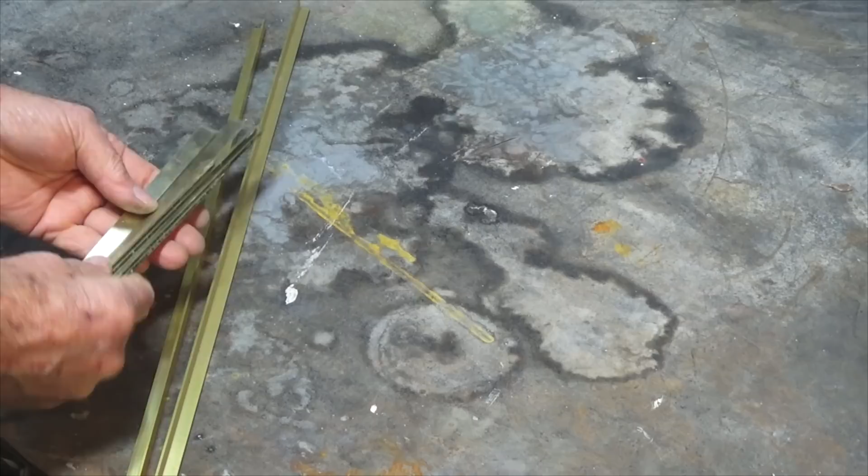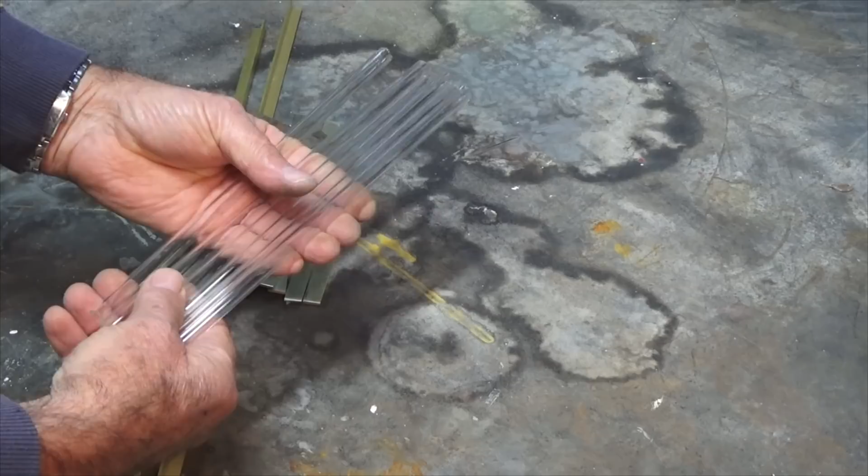So here's some materials we're going to be using in the project. We've got some brass angle stock, some brass strip stock, being cut to various different lengths. We've got some sheet metal brass parts that have been roughly cut to size, some 3D printed parts, and some 10mm borosilicate glass tubing.

And the answer is an Art Deco inspired wall sconce, or actually two of them.

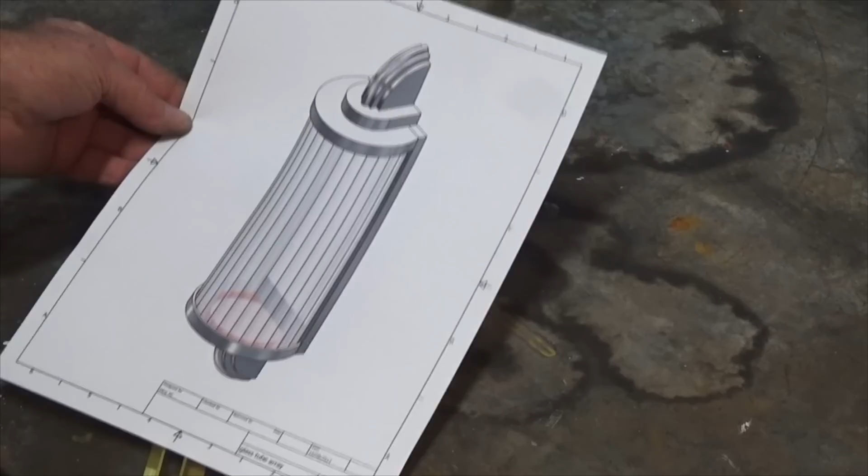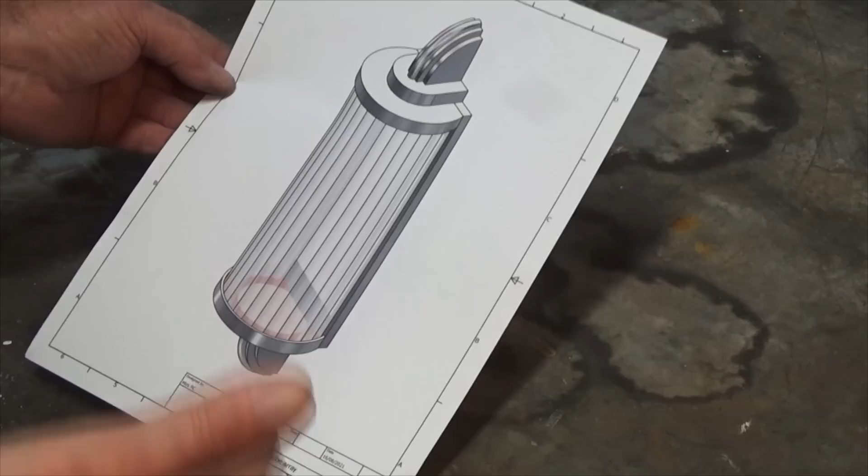Now you're also probably wondering, what is a wall sconce? Well, here's a picture of one. So a wall sconce is a light fitting that you screw to the wall. This is a very old style of light fitting, used back in the times when we had candles and oil lamps as our only source of lighting. The reason they were attached to the wall is that it was easy to get at. They could be placed about head height, and you could usually get at the inside of that wall sconce and light a candle or clean it, or fill it with oil. Another reason they were attached to the wall is that they could be projected away from the wall so that heat and flame would have a harder time setting fire to wallpaper or curtains and so on. Now when these light fittings were electrified and fitted with light bulbs, they served the same purpose.

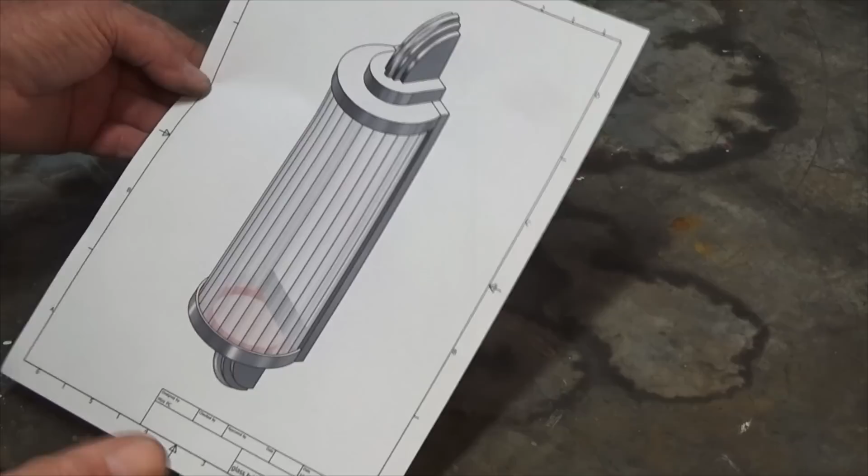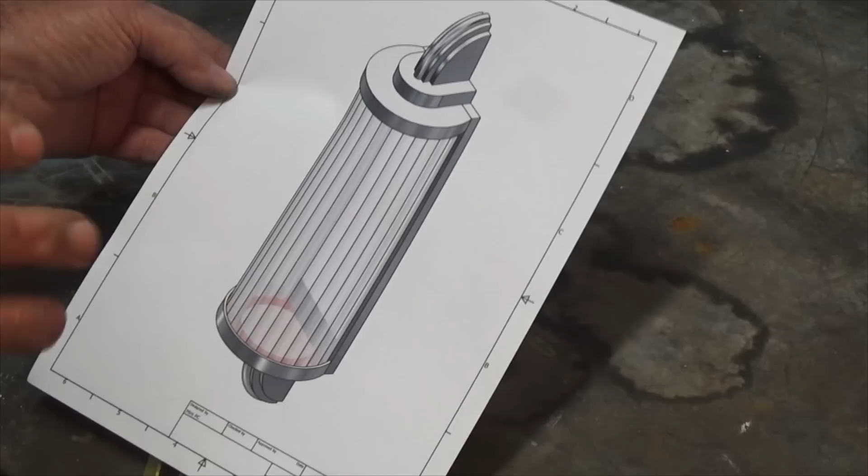A wall sconce is also very handy when you have very low ceilings or very high ceilings. If you've got low ceilings, you can place it against the wall, and there's less likelihood that somebody's going to bump their head on it than if it were fitted to the ceiling. When you have very high ceilings, you can place the light at a level where it's going to do more good. So these things are often used in hallways, hotels, cinemas, where you'd have these very high ceilings, placed along the wall to illuminate pathways and walkways down the side of the cinema seating.

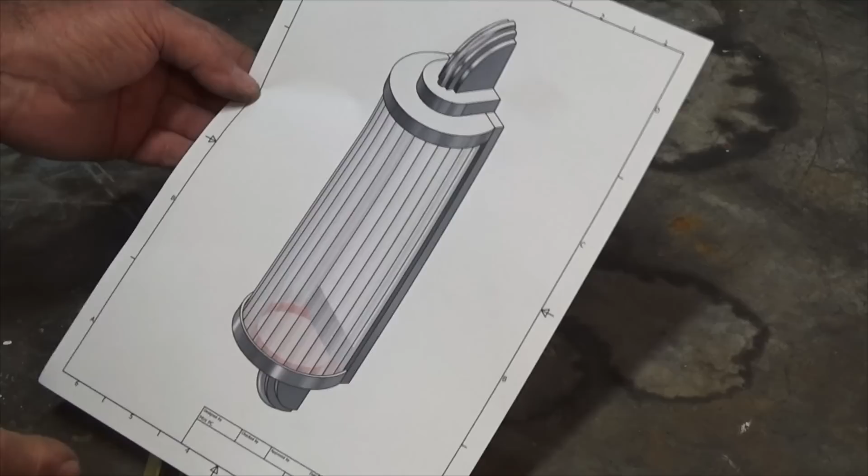Now, this is Art Deco inspired, and this is going in a room in our house, because our house was built, well, it's actually a replica of a house that was built in the 1920s, and that was leading into the period when Art Deco was at its height.

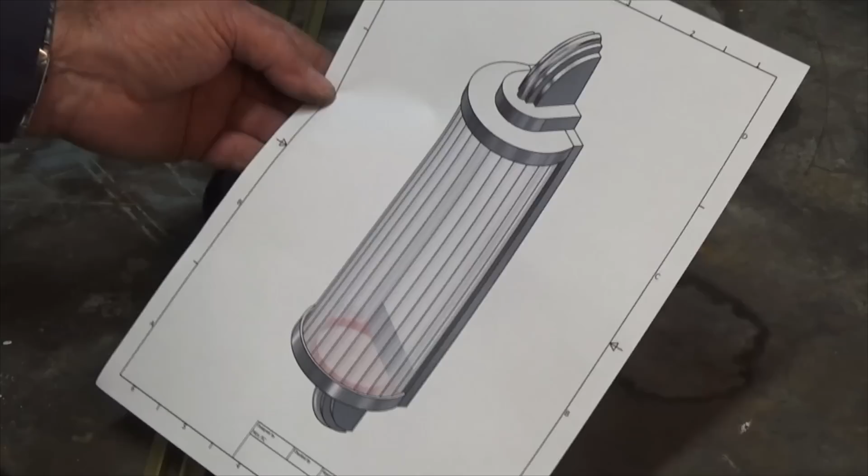So the wall fittings that we have in this room at the moment are sort of Victorian style. They're not old lights, they're new replicas, and the trouble is they're very badly made. These days they make them out of steel and chrome plate them or plate them in some way, but they don't do a very good job, so corrosion starts to come through from the underside of the plating. So we want to replace them, but we want to use something which is going to last a long time.

That's why we're going to be using brass, because it doesn't corrode as readily as steel. I'm going to electroplate the brass when I'm done, and we're going to use glass because unlike plastic, it's very heat resistant. It's not going to crack or break down over time.

So that's the project. So we're going to get started. I'm going to make up a rectangular frame for the back of this light fitting. You can see here, there's a frame running around the entire back side of this, and that's what gets screwed to the wall. Then we're going to have some parts which are fabricated from brass sheet and brass strip. These are going to be castings made of brass, and these will be electroplated along with everything else. So, fun build, and yeah, let's get started.

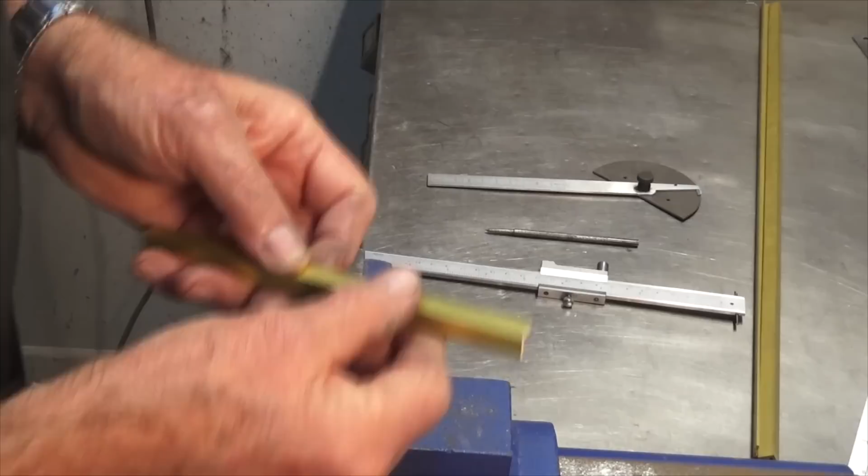This is a drawing of the rectangular frame we need to make. It's made of 3/8 wide brass angle, and it's 1/16 of an inch thick on each leg of the angle. All we're going to do here is mitre one end of this stock, and I'll do that on the sanding belt.

Then we'll measure out the correct length, cut it square, and then mitre the other end back to the line. So I'll go and get one end prepped now. Just got this little fence set up here.

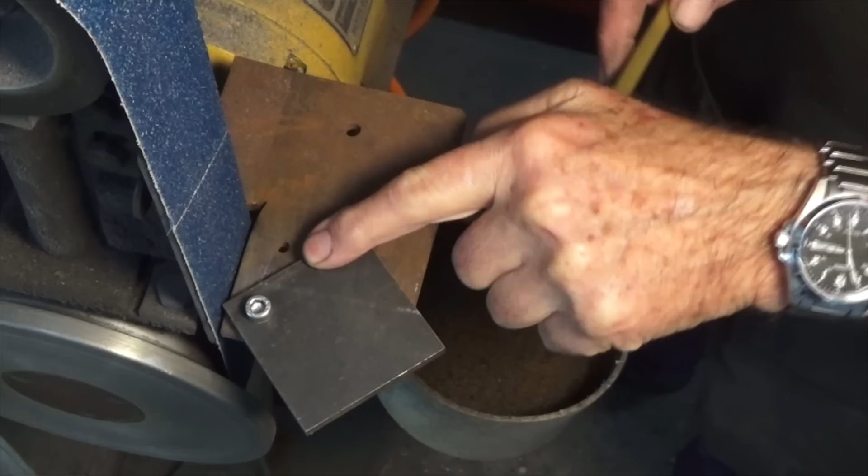It's screwed down 45 degrees to the face of the belt, so I can work the stock in against the belt like that. And when I go to the opposite end, we're going to have to stand it upright like that, but once you get enough feel against that fence there, you know you've got it square.

So I'm going to do one end of each piece of stock. I've got several pieces, so I'll get all of those done now.

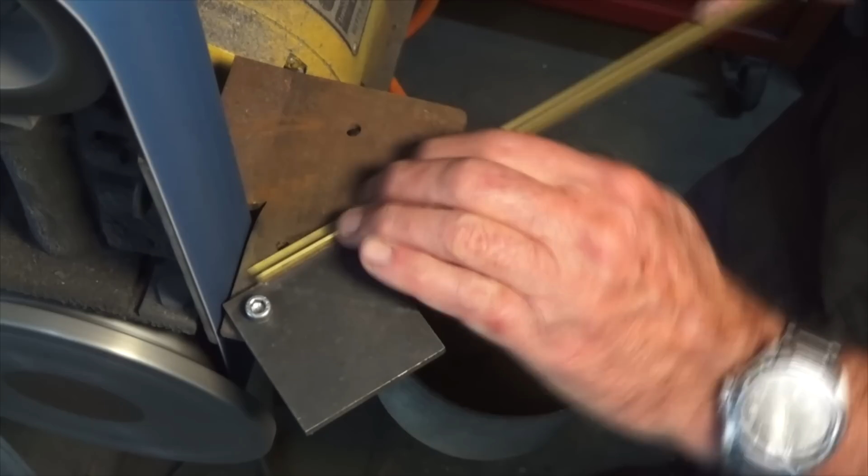Now these short ones, I've got one of these little vernier marking gauges, so I've set this to 83.9 and we're just going to scribe that off there.

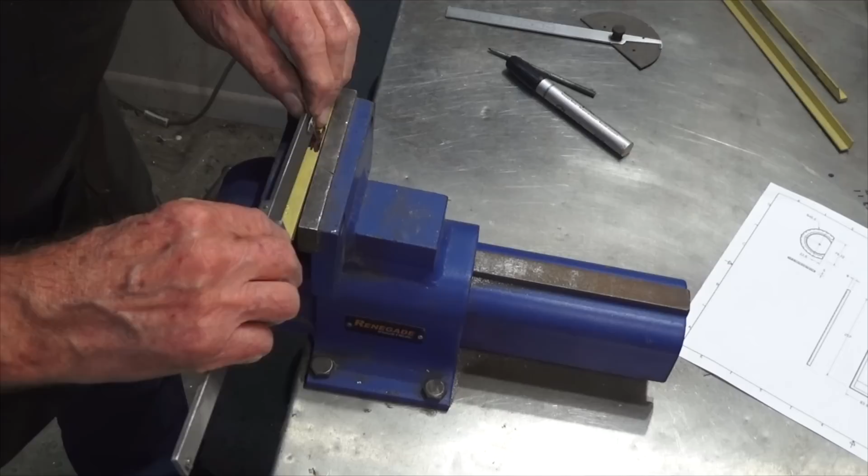And on the longer ones, we're going to have to just use a steel rule. So these are 257, roughly there.

So I'm just going to cut this square and then we'll mitre it back to that line.

Okay, I'll leave us 2 pieces for our frame. I've got to do 2 frames altogether, so there's going to be 8 pieces, 8 corners, but I'll just do 1 to give you an idea, and then I'll go ahead and make the rest off camera.

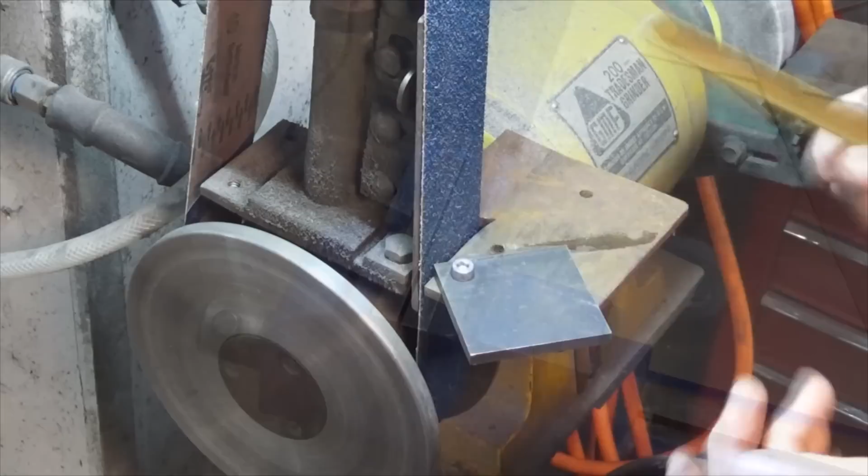So this time for the other end, I've got to put the piece in like that with the flat leg on top. I can see the scribe mark from where I'm standing here, and we're just going to keep cutting in until we just kiss that mark on this edge here.

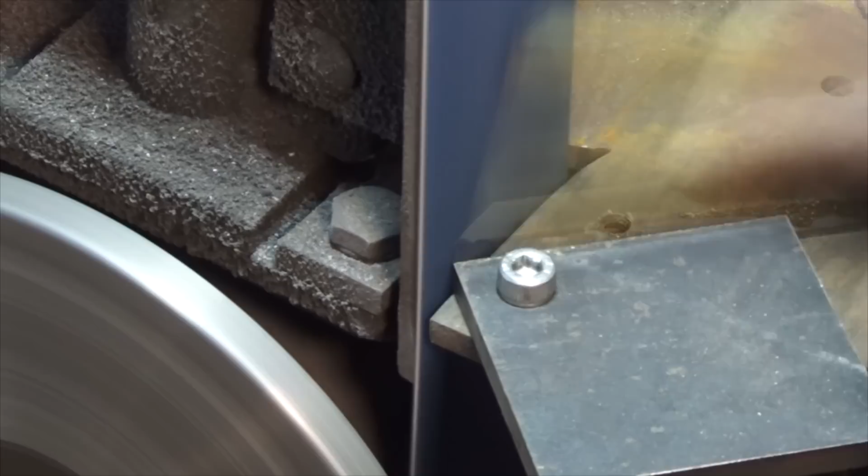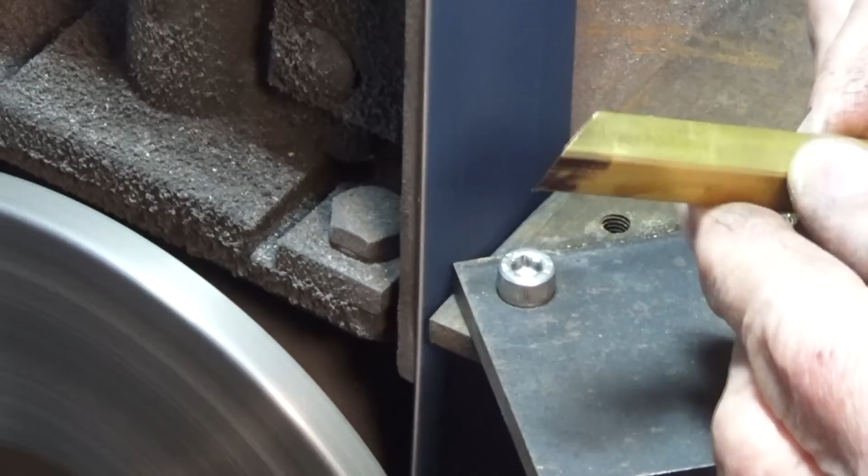Okay, this is a fixture that I made up for doing the corner joints, so we're going to silver solder those mitres, and it's really important that you keep this brass stock flat and aligned while you're heating it and putting the solder in the joint.

So what I can do is lock these parts down just with those socket head cap screws, and you can manoeuvre these parts into position just by having those screws slightly loose.

So there it is there, and this cutout on the corner here is just so that we can get the heat into the brass and not take the heat out through this steel fixture. If that cutout wasn't there, we'd have to preheat the steel, which is a lot thicker, and by the time we got everything hot, this brass would most likely have oxidised and you wouldn't get as clean a joint.

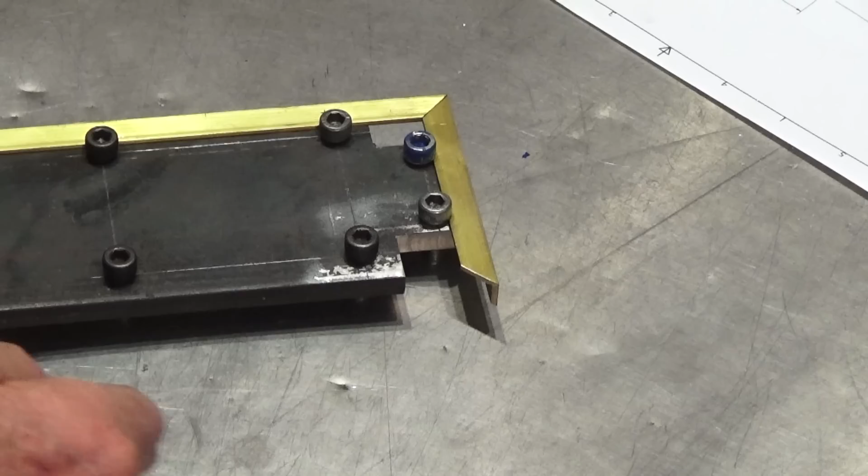And what I can do later on is I can put the other part on this side of the jig here, or the fixture, and just move it over slightly and get at that corner as well. So we'll do the corners one at a time. So let's go and do that now.

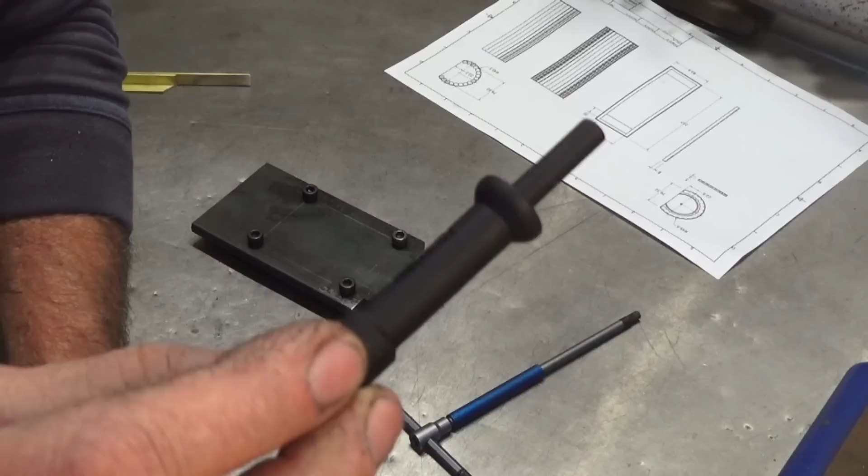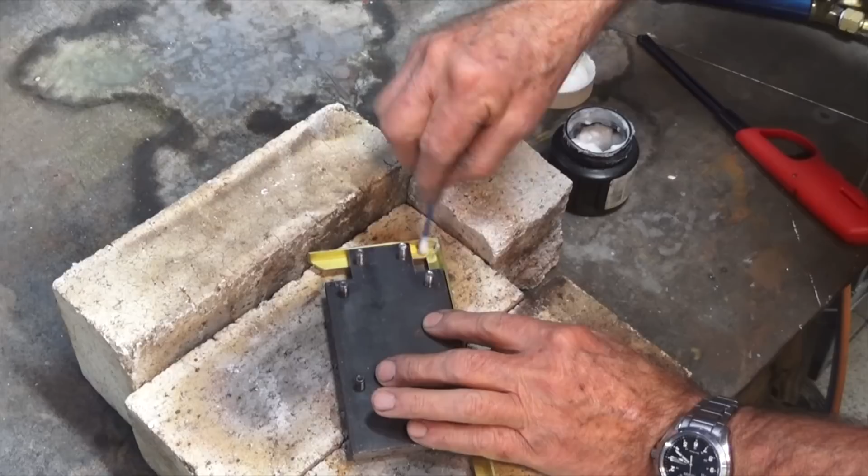So we're just going to coat this with some silver solder flux on the inside. It's probably better to use too much than not enough when you're doing this.

And I'm just going to cut off a small piece of silver solder and put that in the joint or along the joint.

Alrighty. So I'm using oxypropane to do this.

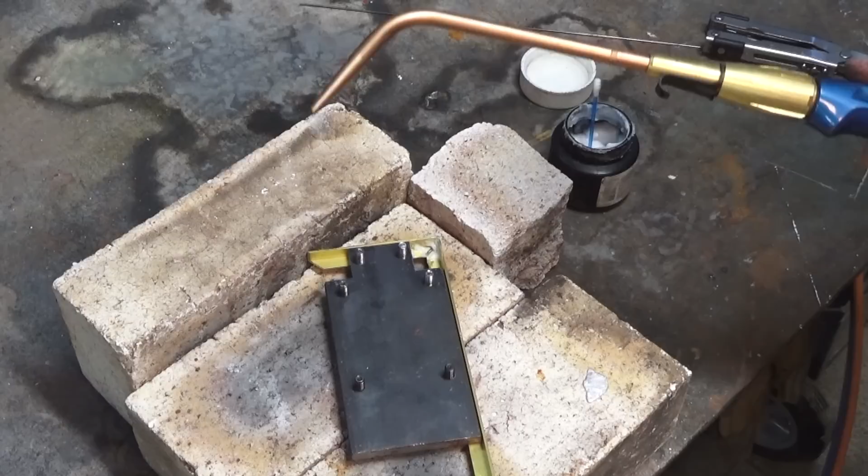So just gentle heat to start with. If you boil that flux off too rapidly, it'll shift the silver solder around. What you should see happening is the silver solder, or at least the flux, should dry out. And then it sort of goes glassy.

I think that's run all the way along there. I'll just give it a bit more. Alright, that's one done.

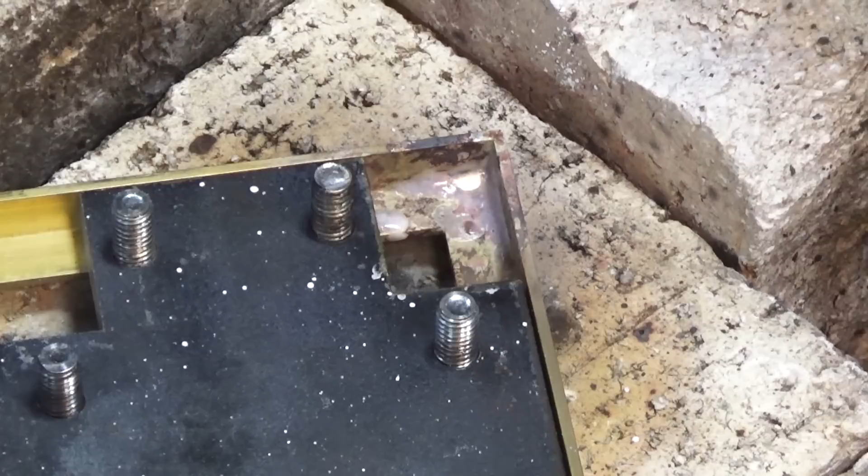Now it looks pretty horrible, and we will need to pickle that to get rid of that silver solder flux. It's basically a borax material, and it will dissolve in sulfuric acid. That'll clean the joint as well. But I'll get all 4 joints done, and then we'll clean it all up at the end.

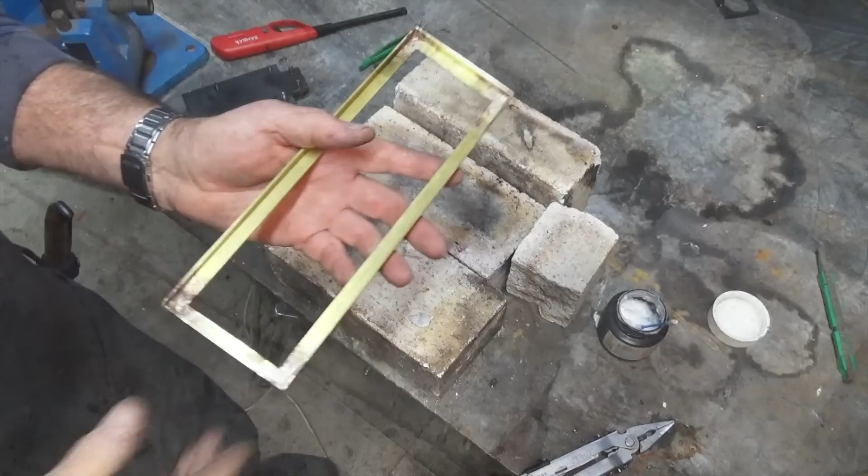Now there's the first frame done, and I just cleaned up this corner here on a Scotch-Brite wheel. It's sort of come out pretty good. It will need to be pickled in sulfuric acid though, to get rid of all of this glassy flux on the inside of the joints there.

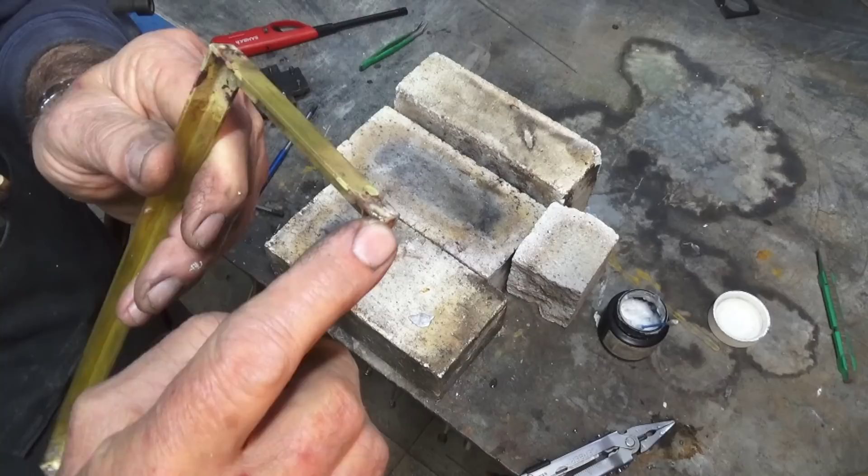And I don't know if you noticed, but I completely botched this corner here. I overheated it and it's melted away. So I'm going to have to clean that and then build that up with probably soft solder. One of the good things about electroplating this material is that you can electroplate over soft solder, silver solder, brass, and it's all going to come out the same when you're done. But yeah, I just overdid it with the heat.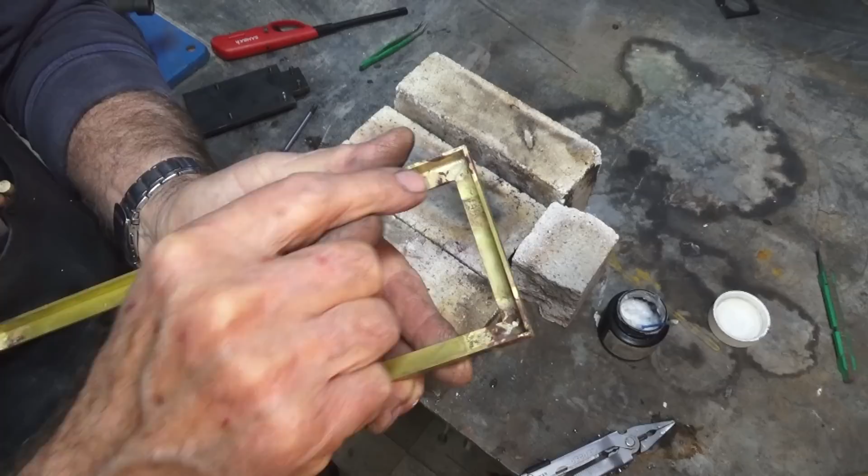What I'm finding with this silver solder that I bought is that it doesn't flow as readily as the stuff I used to use. Back in the bad old days, you used to be able to buy SBA 45, which was silver brazing alloy, 45% silver, but they also put cadmium in the alloy. What the cadmium did was it made it flow so much better. It just wets the joint, flows right through the joint very easily.

Only problem is cadmium is toxic, and if you boil the silver solder, the cadmium comes off as a vapor, and it can give you the same symptoms as a heart attack. I've noticed that in the Model Engineer magazine, they reported a lot of model engineers in England dying of what looked like heart attack symptoms. But what was happening is they were doing this in winter in a small enclosed workshop, and they were breathing the fumes, and yeah, it was killing people. So workplace health and safety removed the cadmium, but it just doesn't flow as readily as it used to.

Anyway, I've got another frame to do, and I can guarantee when I get to the 8th corner, I'll have it nailed. Alright, this is the 8th joint, so let's see if I have nailed it.

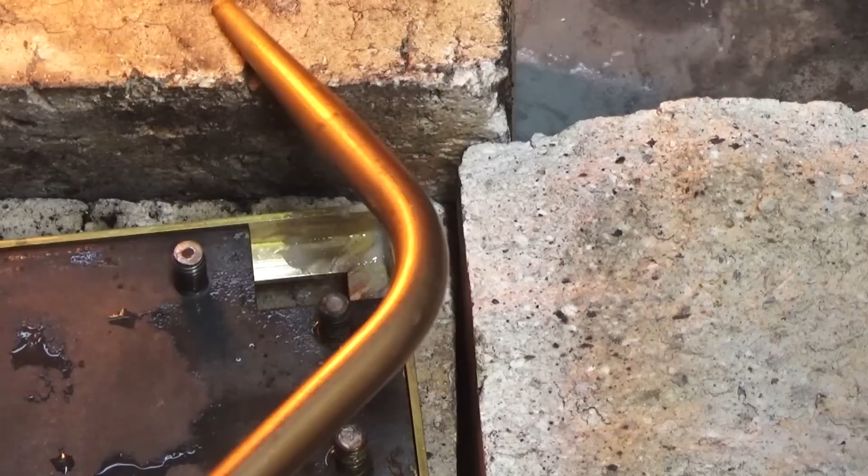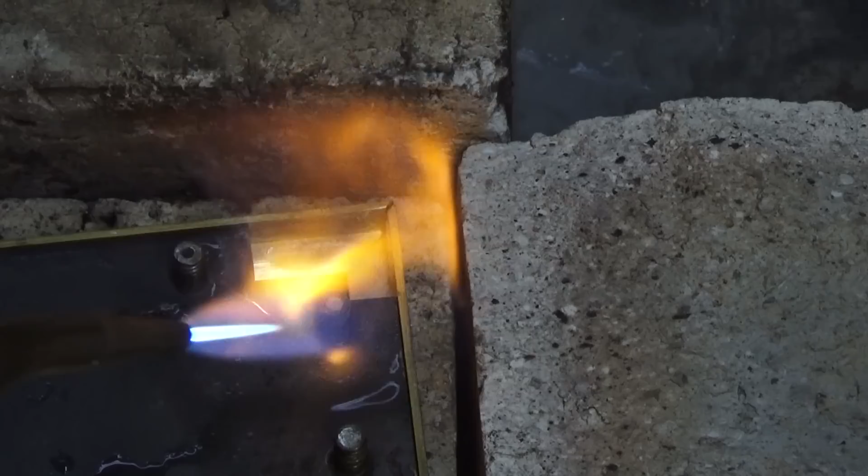So what I found is that heating it from the top works better. It's a lot easier to judge the temperature. If I push it into the corner of the bricks there, I can get some reflected heat back from the fire bricks. Then I put the silver solder in when the brass has gone red hot, and it just sort of flows straight away. So a bit counterintuitive, it's not how I thought it should be done.

It just shows you, if you stick at something long enough, you'll work out the correct method.

You may not have noticed there, but it just sort of ran up that vertical joint, filled the mitre, and I don't have as big a build-up of silver solder in that corner there. So everything I showed you in that first example, just ignore that. That's the right way to do it.

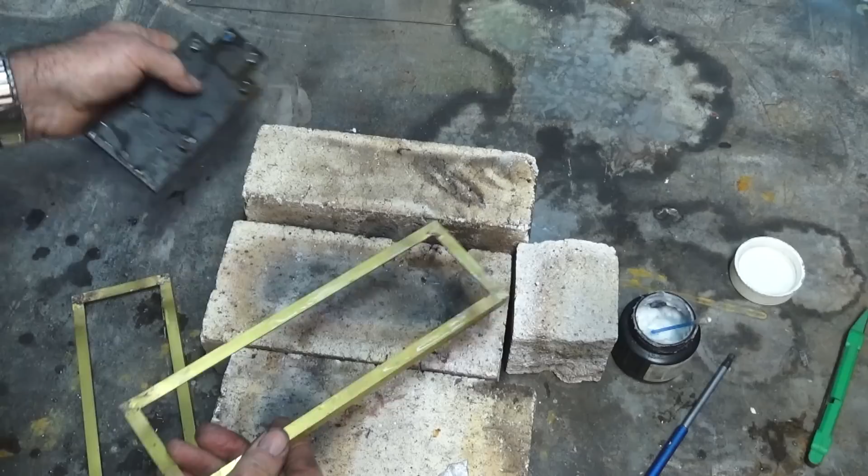Alright, so there's the second frame. Here's the first one.

And they're nice and square, same size. So what I'll need to do now is just clean up all these corners, get them all sort of semi-polished.

Right at the end of this build, we're going to have to do all of the polishing on the brass and get it really, really good before it goes into the electroplating bath.

Now that these silver solder joints are done, we need to remove all of the excess flux. It's still on the surface of that brass there, and it sort of goes like a glassy consistency. Quite difficult to remove any other way, but an acid pickle will eat through that flux very quickly.

It will also remove all of the oxide from the brass. So I'm going to do one of these in sulfuric acid, and then I'll show you a safe alternative to sulfuric acid if you can't get it. So let's get this one in the acid first.

Okay, what I've got in here is about 15 litres of dilute sulfuric acid, and that green or blue colouring you can see there is just contamination from copper. I've used this quite a few times for pickling copper, and some of that copper goes into the solution and it leaves it that colour. But we're going to put our brass part in there, and we're going to leave that for about 20 minutes, half an hour, and then we'll take it out and have a look.

I'm going to show you another material we can use if you can't get sulfuric acid. This is the best alternative I've found for doing this sort of work, and if you're in a home workshop and you don't want to have acids lying around, especially if you've got pets or young children, this is a much safer solution. So we're just going to use ordinary vinegar and table salt.

So the recipe is 1 cup of vinegar, and then 1 tablespoon of salt. Normally what you do is you heat that up to help the salt dissolve more quickly, but if you leave it overnight, the salt will dissolve into that vinegar quite readily.

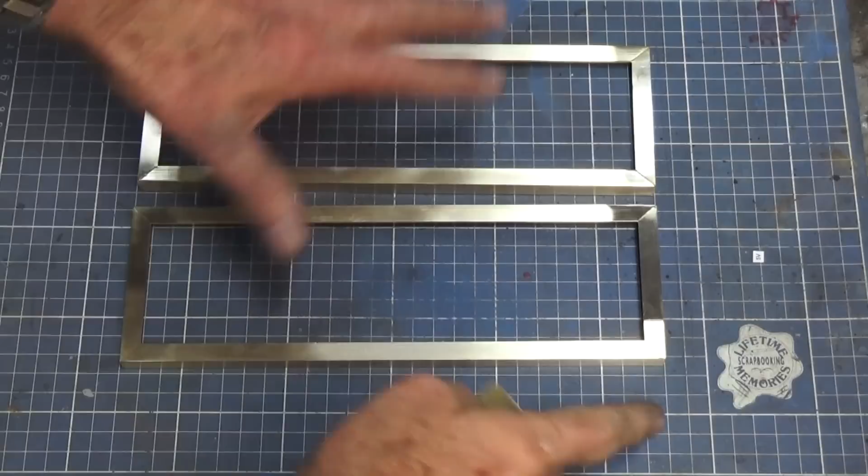There's our two frames, sort of partly cleaned up, and what I want to do now is make two pieces of this 20mm wide brass sheet, and they need to fit in between these edges on the frame. These are going to be a mounting point for all of the decorative parts that hang off the top and bottom of the light fitting, but also for these light sockets.

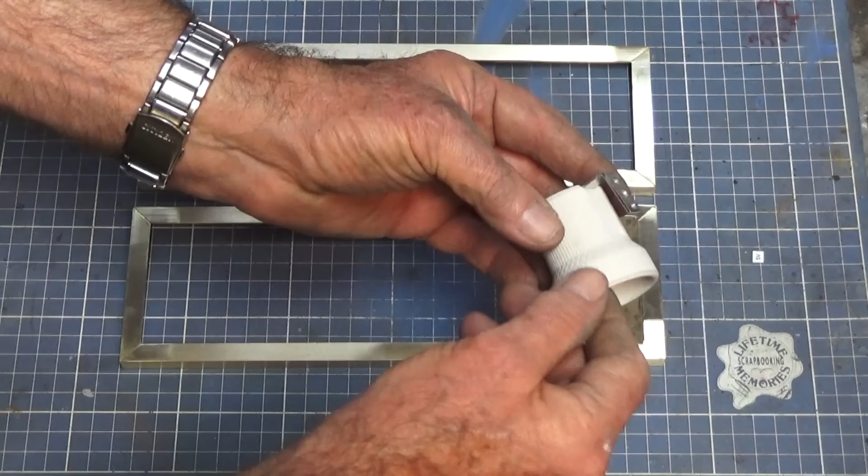So this is a ceramic socket with an Edison screw fitting, and it's got a steel right-angle fitting there with a couple of threaded holes, and there's our wiring points there.

That's going to allow me to screw those top and bottom from what will be the outside of the light fitting. Now the only problem is I don't want to solder this edge to edge - I want it to have more contact area. So I'm going to machine a slot down both ends of this stock here.

This is 2mm thick. The brass angle is 1.6 thick, so I'm going to have to go almost to the back surface, but it can be done. Then I'm going to push that into place and soft solder around three edges, and that will give me plenty of contact area. Soft solder will be plenty strong enough for this.

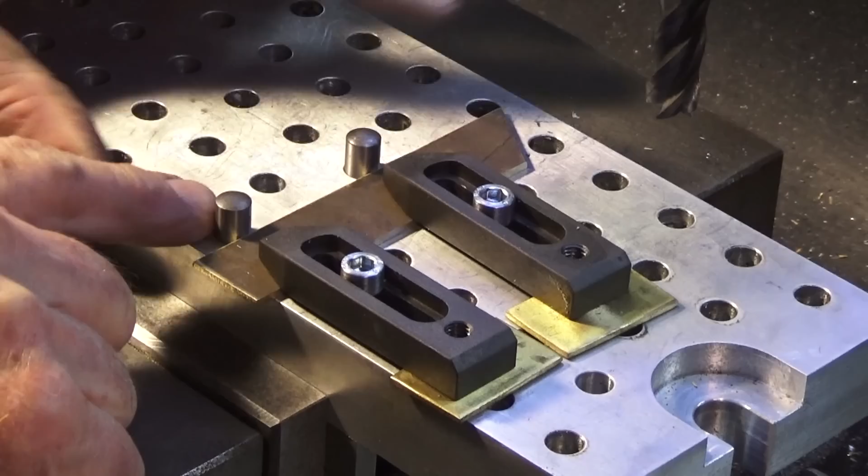Now this is how I'm going to hold this stock here. I've got this mini pallet in the vise on the mill, and a couple of clamps holding that up against some 8mm dowels, so I can align this square to the pallet. I'm just going to machine one end square, then do that little rebate - it's going to be 2mm wide and 1.6 deep - then flip it end for end and do the same at the other end.

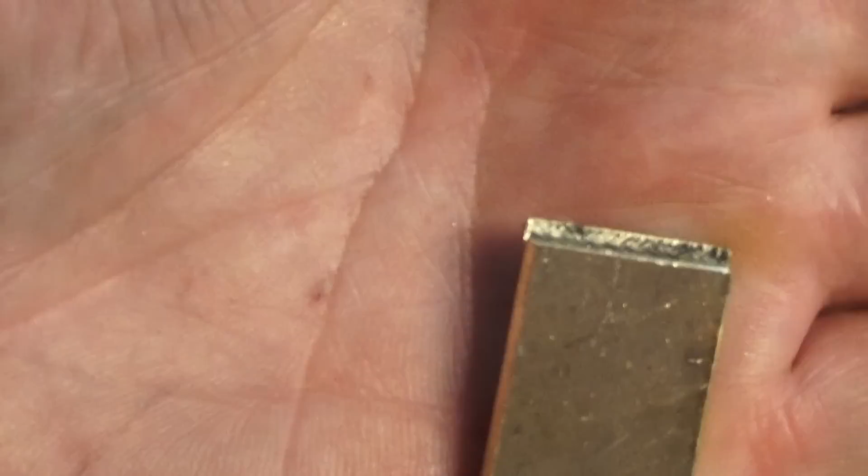Well, there it is, and you can see there's not a lot of meat left on that, but it worked okay. We're just going to machine this to length now and do the same at the other end.

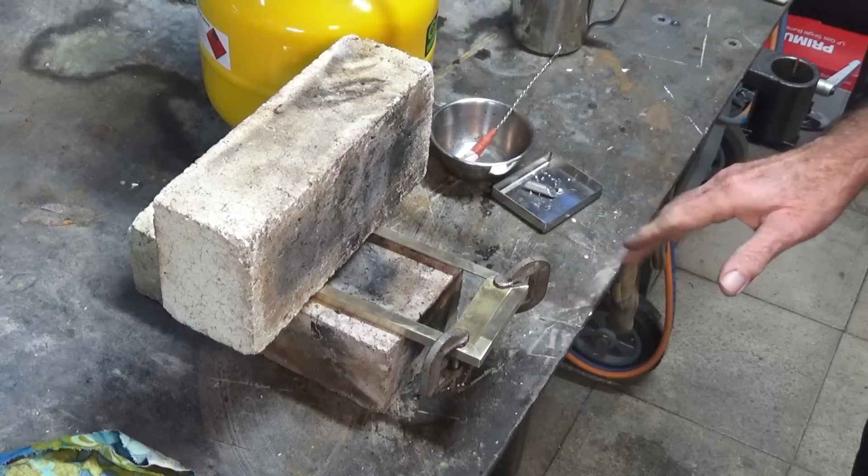Okay, I'm ready to join these little plates onto this brass angle frame that I've made, and there's probably ten different ways you can do this, but I've decided to do this really old school. So I'm going to use a copper soldering bit on a gas flame, using 60-40 lead tin solder.

I've got some zinc chloride flux in a small container here with a silicone brush, and I've got another stainless steel container with some dilute zinc chloride flux. This is going to be used to clean the copper soldering bit before we put it on the metal.

So I'm just going to do this one, then I'm going to talk over it as I go and explain some of the points about using this old school method for soft soldering.

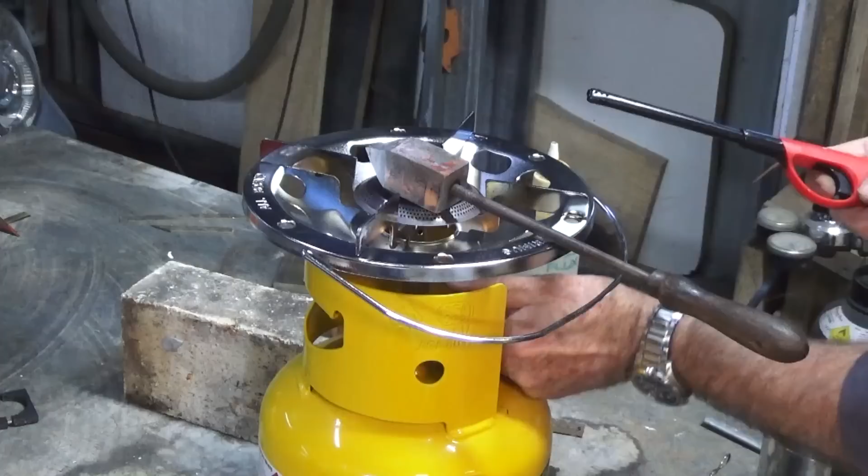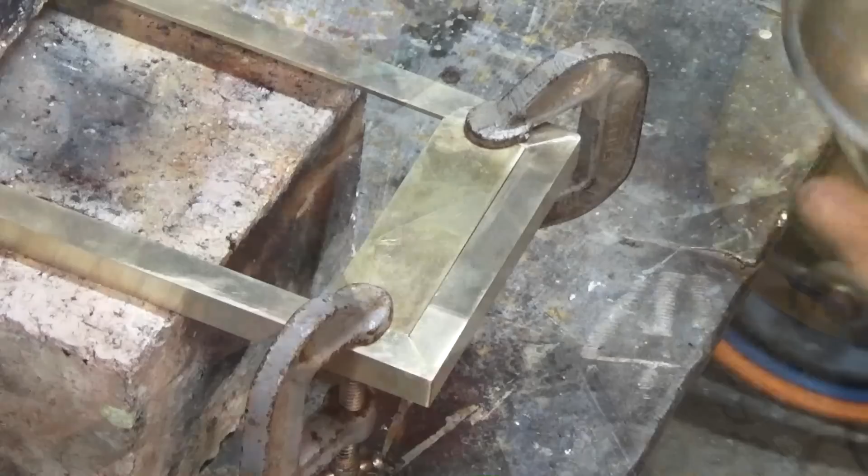The secrets to successful soft soldering are to ensure that you get adequate heat into the work. The soldering bit I'm using today is a 16 ounce, but I don't want to brag or nothing - I got a really big one. Yeah, that's right, 24 ounces, beat that. I'm using the 16 ounce on this job though, and I'm heating it up at a gas flame.

You need to leave it there long enough that the solder is melting onto the tip of the soldering iron easily and quickly. If you have to hold it for a long length of time against the solder, it's not hot enough. If you overheat it, you can burn off the solder coating, or the tinning as we call it, on the end of the bit. So you keep the gas flame low, but make sure that you've got adequate heat.

Now you also need to make sure that heat can transfer into the work. I've already prepped this material by cleaning it with salt and vinegar or sulfuric acid.

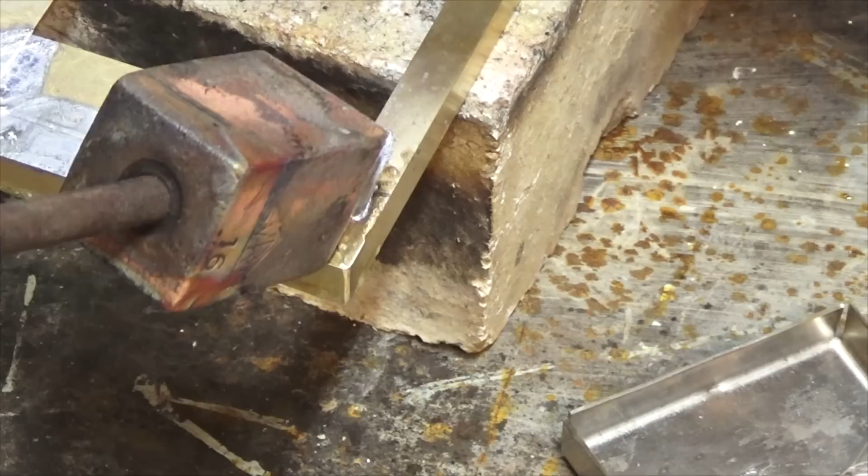I've also scuffed it with a Scotch-Brite pad, and I'm using an acid flux - in this case zinc chloride. It does a really good job of removing any last trace of oxide before you hit it with heat, and it forms an oily film over the surface that prevents oxide from forming as you're heating the material. So oxygen is your enemy when you're soldering.

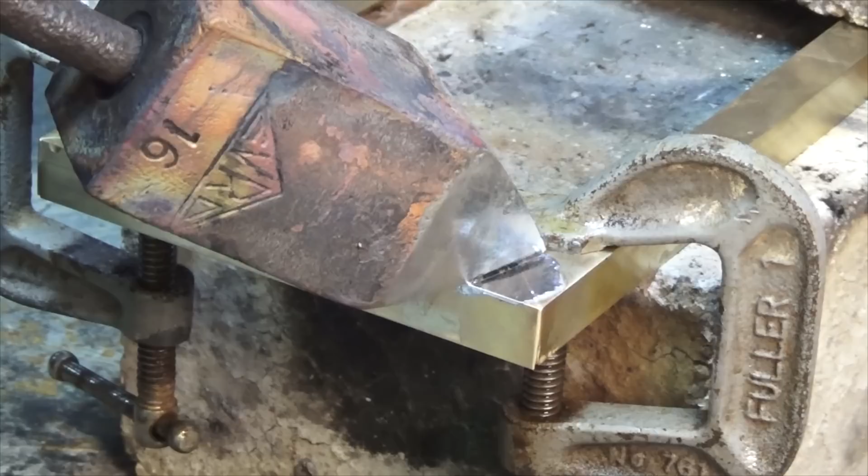You need to make sure you're allowing sufficient contact between the soldering bit and the work. Preferably use the face of the bit, or the edge if you can get it in there, and move the bit slowly so the heat has time to transfer into the work. When the temperature of the metal reaches the same temperature as the molten solder on the bit, it will flow like water - flowing ahead of the soldering bit and wicking into the joints. It should go right through to the back of these surfaces when I'm done.

If you do all of those things, you will get good clean solder joints with adequate strength. You can wipe off the excess solder with a cloth as you go - in my case I didn't do a lot of that. I wanted to build up on the miters so I could clean it back later on and fill them. But all in all, these joints turned out really good. They're strong enough for what we're going to do here, and it's simple and easy. So if you haven't tried it before, give it a go.

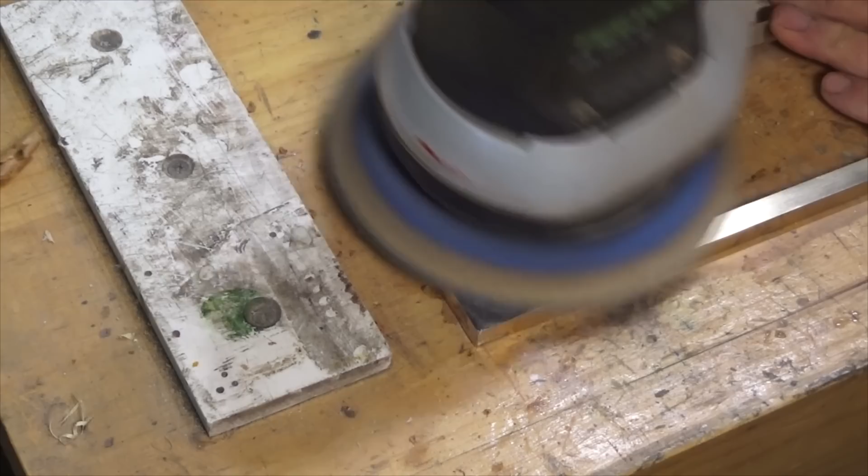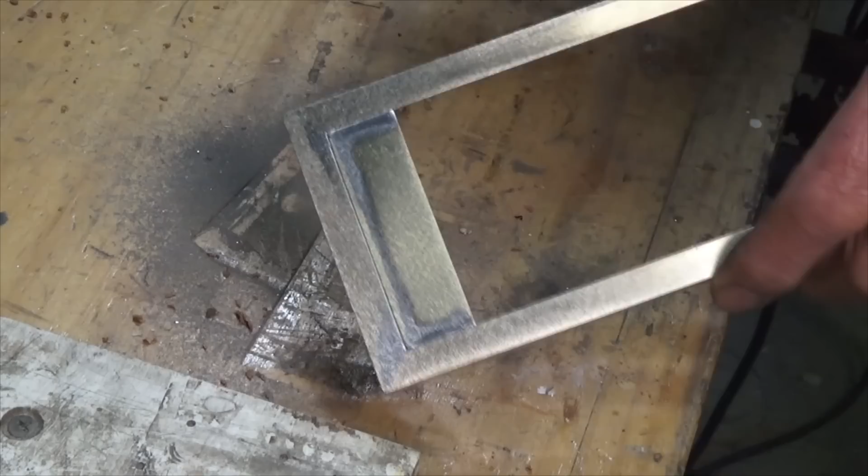Just one thing - you need to make sure you choose a soldering bit that's the correct size for the work you're doing. One of those little electric soldering irons used for electronic soldering is useless on a job like this. It doesn't have sufficient heat reserve, you can't generate the heat quickly enough, and you simply won't get the solder to run and form an adequate bond. So if you can get one of these old copper soldering bits, buy one. Have a look around junk shops, second-hand shops - often you see them there. If you can find them and keep one handy, they are useful for doing this sort of work.

Okay, let's finish up here and clean it and have a look at it. Well, there's one that's just come off the belt sander with that Scotch-Brite belt, and it does a really good job - puts that lovely satin finish on it.

Here's one that I went a bit further with. This one has had the edge polished, and I've also fitted one of the light sockets and one of the bulbs, but there'll be a duplicate at the other end later on. This is the only surface of this frame that's going to be visible when the light is finished, so I haven't bothered about doing anything with this surface here - I've just sort of sanded that flat.

I haven't worried about removing all of the excess solder - this can stay like that. This will be the inside of the light later on, these surfaces here, and with all of the glass tubing in place it'll be diffused enough that you won't see it. So for now that can stay like that.